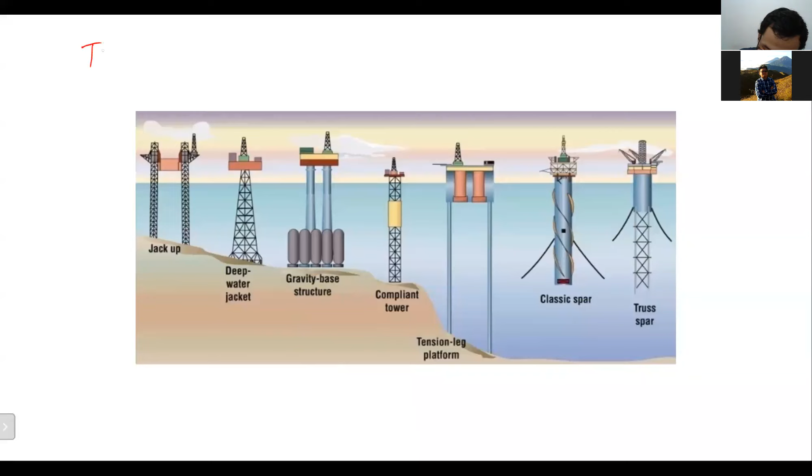So for now, I think I will continue with the discussion on truss. Okay, truss. Anyone here knows what is truss?

Any of you? I believe some of you have. Any of you? I believe most of you know about your parents' occupation. Does any of your parents work in the oil company or in the service company?

Mine, sir. Where, sir? In Konoko. Okay, so has your parent told you about his job there? Sir, yes, several times. What is his main job there? He's actually a project cost control advisor. Cost control advisor, okay.

Maybe it still has some relation because when talking about building a bridge like that, most likely your parents will be involved as well. Okay, in the oil company or in the service company, normally if we work there, we have to deal with a truss system like this.

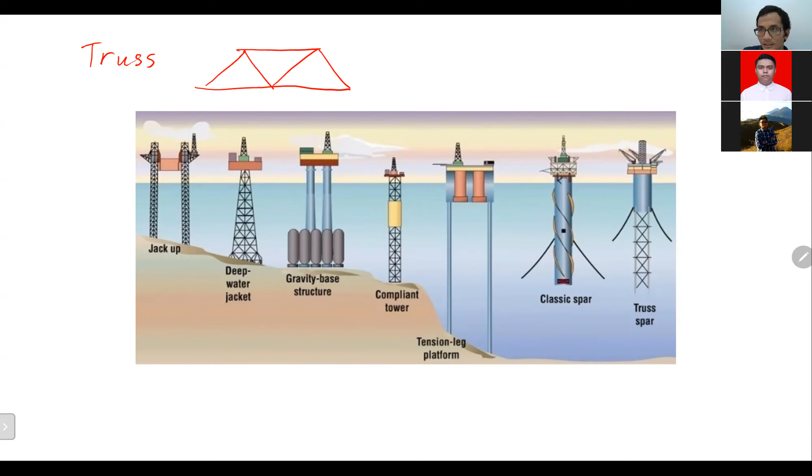Okay, this is a truss system which is available in the oil company. Okay, when we talk about truss, I believe you have seen this kind of structure, right? Something like this. Actually, it's not just available in truss, but in the bridge as well. In the bridge, you will see this kind of structure, right?

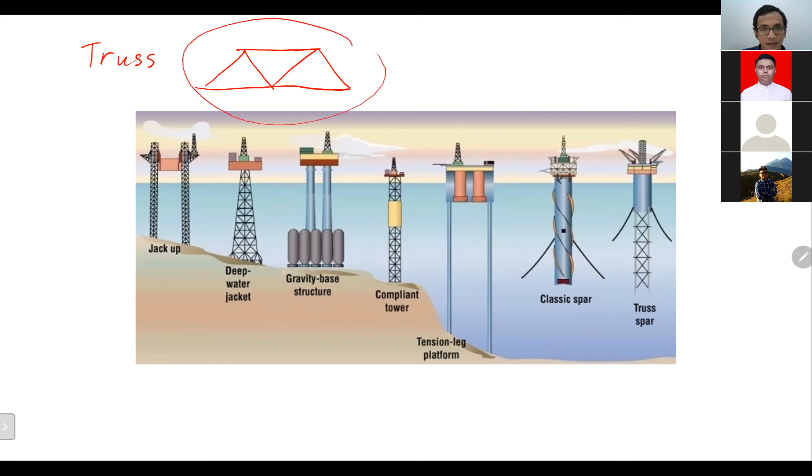Something like this. Also in cranes, right, sir? Yeah, crane as well. Crane, bridge, something like this. Okay, and in the offshore structure, yes, crane as well, yes.

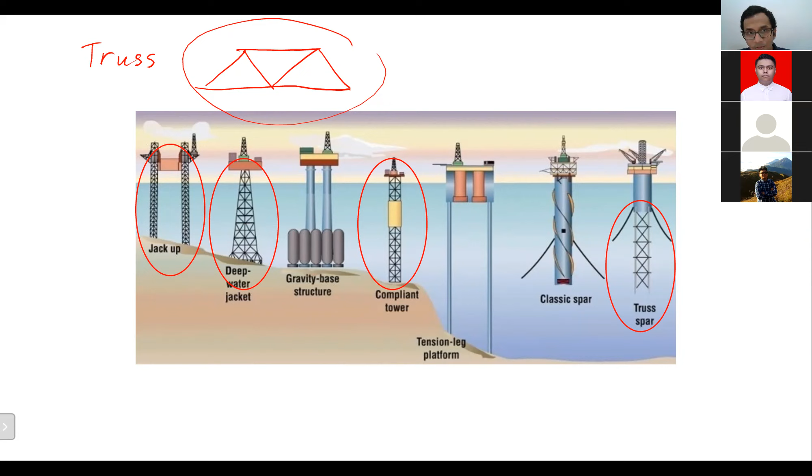So this kind of infrastructure is everywhere actually. So if you ask me what is truss structure, it is actually the structure which consists only of two force members. What is a two force member? I will explain to you after this.

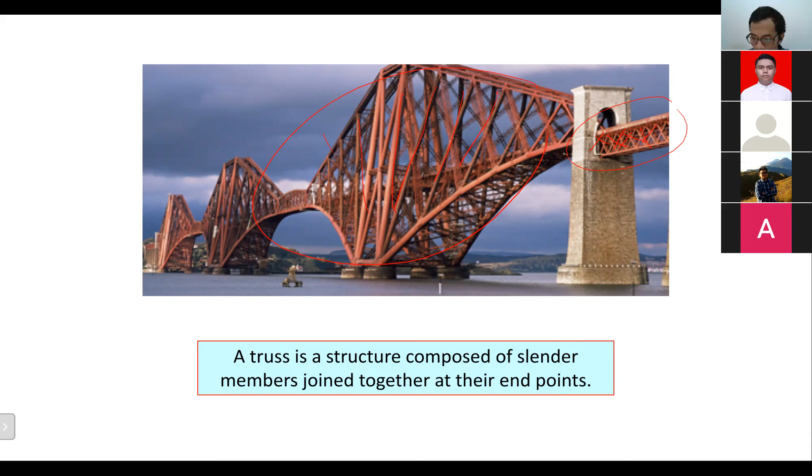So it consists of truss. So truss structure is something which consists entirely of two force members. Okay. How can we differentiate a two force member from other members? The other members you can see are slender members,

joined together at their end points. You can see, right? So in comparison to the bridge size, the member here, the beam—not the beam, the member here—is actually quite slender in comparison to the whole bridge size, correct, right?

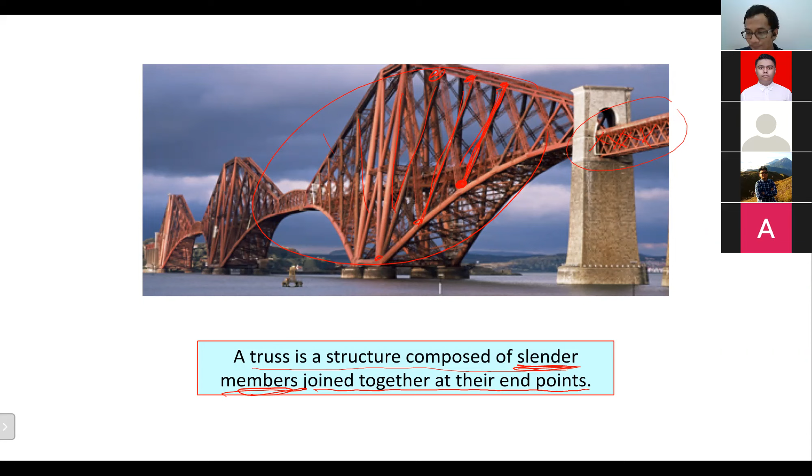And each member is only connected at the end of it, only. Each of those members are only connected at the end, only. Okay, this kind of structure you've seen everywhere, and we call it a truss structure. Okay, the same as this one. You can see there are a lot of members there. This is one of it.

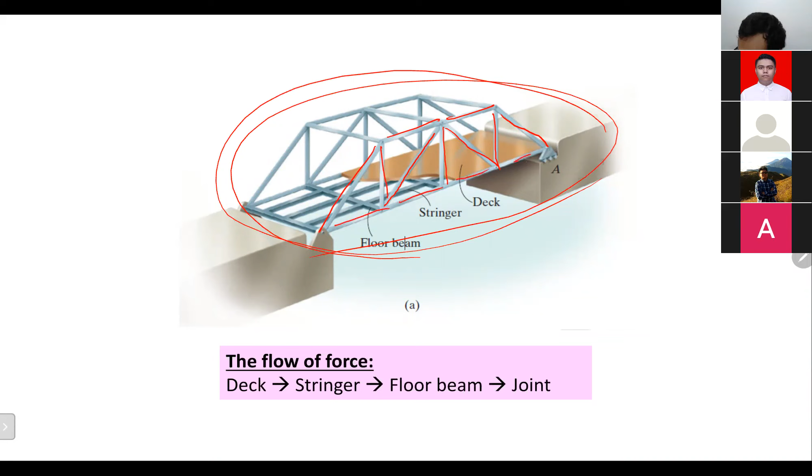Okay, and all of those are connected only at the end, at the end of the member. So all the connections are happening at the end. So there is no connection in the middle. That's why we call it a truss structure.

Anyone here still confused about what is truss structure? If yes, please let me know, and I will try to explain, try to elaborate a little more.

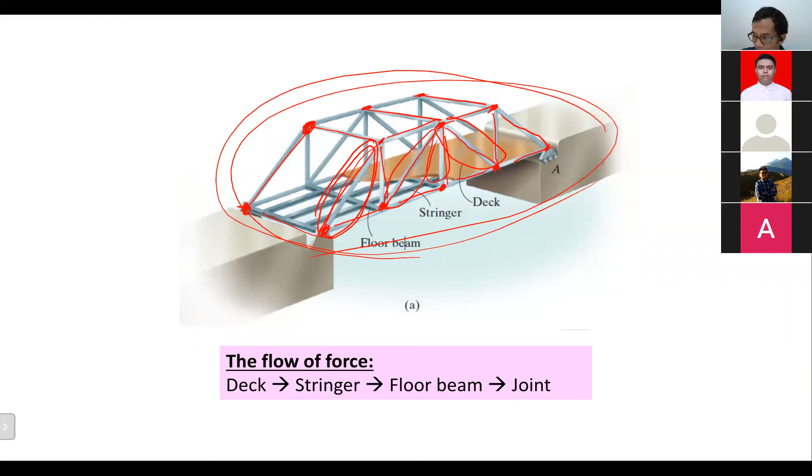But the most important thing about truss structure that you're supposed to learn is what is so special about it. Whenever we talk about truss, each member, or tiang-tiang, each of the members can only withstand either tension force or compression force. It cannot withstand bending, it cannot withstand force in other directions. So it's either tension or compression only. That is what's so special about truss.

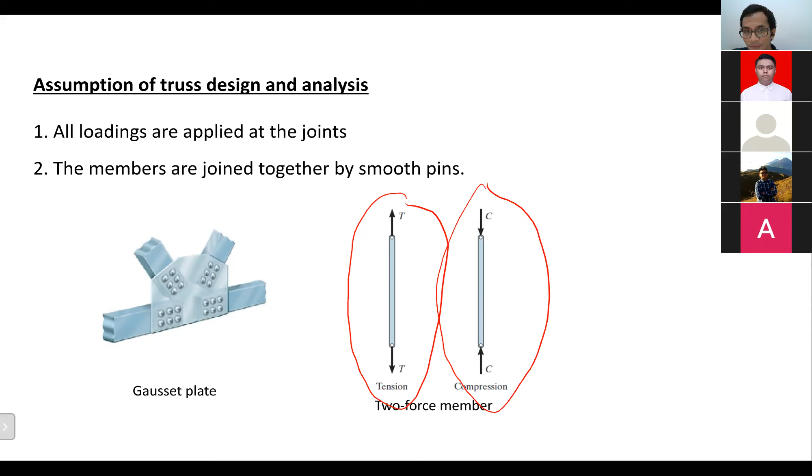And we call this kind of member a two-force member. Why do we call it a two-force member? Because the force only happens at both ends only, and the direction is either tension or compression like this. That's the first special thing about truss. So all the members, seluruh tiang-tiangnya, all the members must be two-force members. So must be like this.

Then the other assumption you're supposed to know when we talk about a truss system is that all the loading is only applied at joints. That's why the force is happening at only the end of the pin, the end of the member.

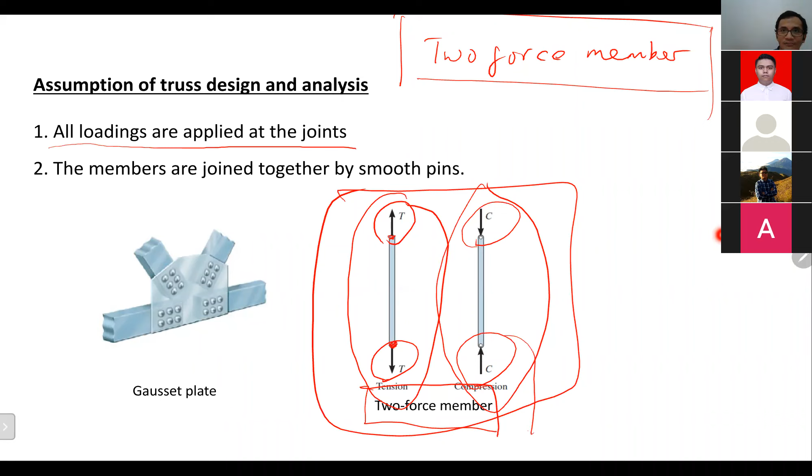Beside that, we always assume that the members are joined together by smooth pins. Sometimes we have something like this, right? If we assume that the structure is a truss, this kind of joint, we have to replace it by smooth pins, because in our truss analysis, everything is simplified, so smooth pins must be assumed like that.

Any question about the definition of truss? I'm sorry sir, I would just like to make sure, so the truss design itself doesn't relate to the materials, right? So if it's wood, it's still called truss as long as it's the structure itself.

Yeah, unluckily for you guys, you have never been to the Aula Barat or Aula Timur, West Hall, our ITB West Hall and ITB East Hall. Those two halls are very famous in Indonesia because they are very old halls, and some part of it has a truss structure which is made of wood. Irfan, so it's not necessarily have to be from metal, it can be from wood as well, or from other kinds of material.

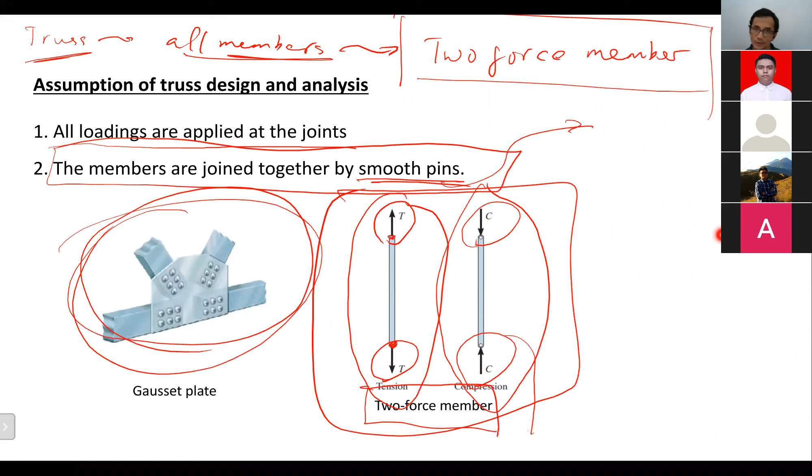Okay, that's the definition of truss. All the members must be two-force members. Any other questions before I go straight to the main problem that we have?

Sir, I want to ask about these smooth pins, Rafi. Do they have a specific property that differentiates them from like nuts and bolts or something like that? Okay.

Actually, nuts and bolts, sometimes we can assume as a smooth pin as well, because smooth pins is the easiest assumption that we have. Why is it the easiest? Because when we talk about smooth pins, for example, it's like this.

If we have a beam like that, at one end we put the smooth pin there to the wall, and at the other end there is a roller there. If we are talking about smooth pins here, because it's smooth, it will not give you a moment reaction. Because it's smooth, it will only give you horizontal or vertical forces. That's what's so special about smooth pins.

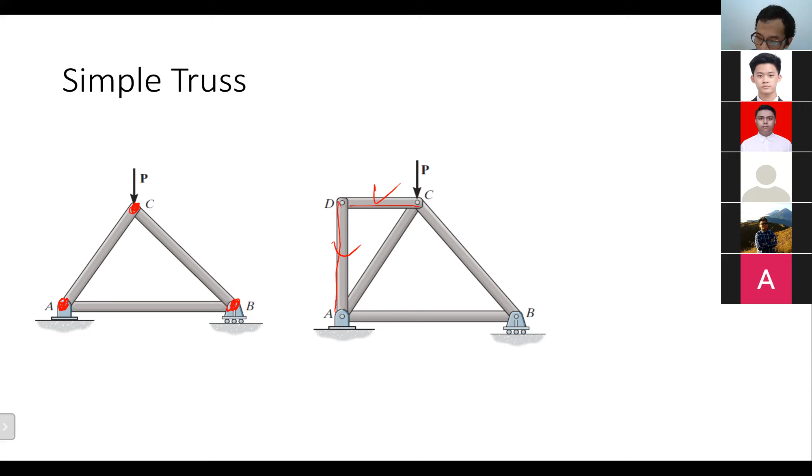The first thing that we're supposed to learn about truss is how can we analyze it? When we have a truss system, for example a bridge like that, a simple bridge like this, for example, pin at one end, roller at the other end, simple bridge like this. Then we know that there is a load, a car or something like that, 10 kilonewton, for example.

When we talk about this, we're supposed to know what forces are happening at each member. Why? Because normally each member has a maximum capacity, the maximum load where it still can handle. If it's more than that, if it's more than the capacity, if it's more than the maximum load that it can handle, that particular member will break. If the member breaks, the structure will collapse, and we don't want that. In statics, we don't want that. That's why it is very important for us in the truss analysis to know about the forces which is happening at each member.

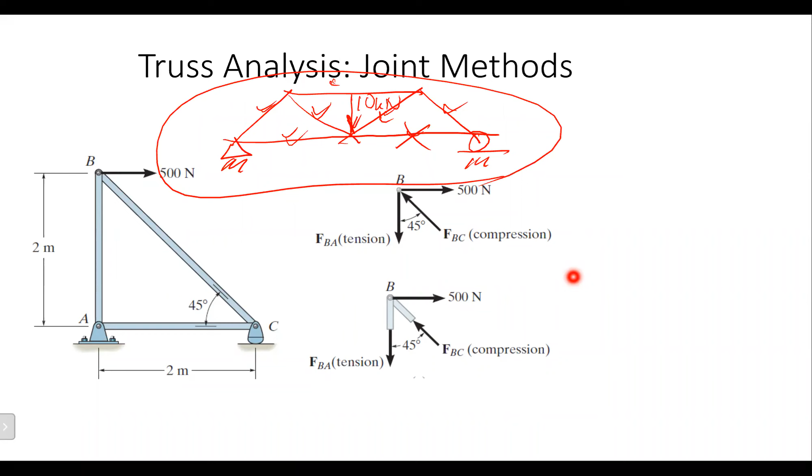Sir, I want to ask. Who is this? Azhar Nanda. Okay, Azhar. So if one of the joints collapse, all of the structure will... No, we are not talking about a joint which is collapsed. We are talking about a member.

Okay. Yes, of course, the joint will have the maximum load where it can withstand as well, but we will assume that the joint is perfect in our calculation, always like that. That's why in this case, we try to take a look at the forces which is happening at each member. If the load there is more than its capacity, the maximum load where the member can still handle, then it will collapse. That particular member will collapse.

But when one member is collapsing, the rest will be collapsing as well, because it will be a sequence like that. When one member is collapsing, and when one member has collapsed, there will be no load there anymore, so it will not be able to withstand load anymore. So it will affect the other member as well. The load that the other member must withstand will become bigger as well. So most likely, if that happens, the other member will collapse as well. That's why when you see a bridge collapse, sometimes it started with one member, then the rest will follow up. Do you get it, Azhar? Yes, I get it.

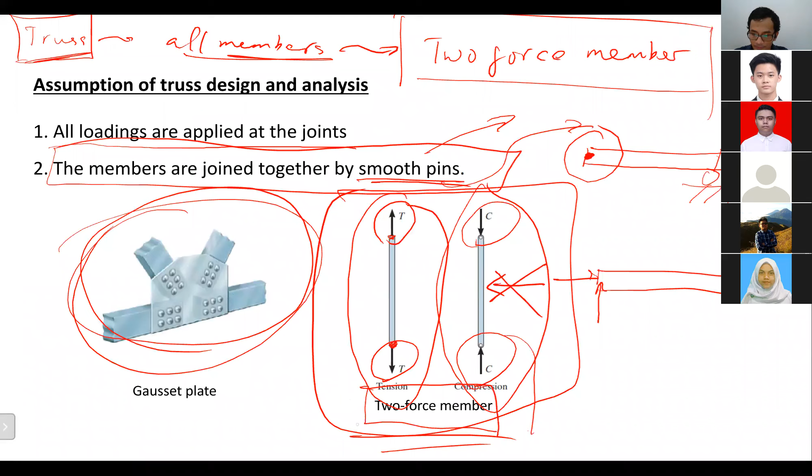The answer is simple, because I told you from the beginning that each member in the truss structure can only withstand either tension or compression. As I stated here, only tension or compression. At each member, it can only withstand tension or compression.

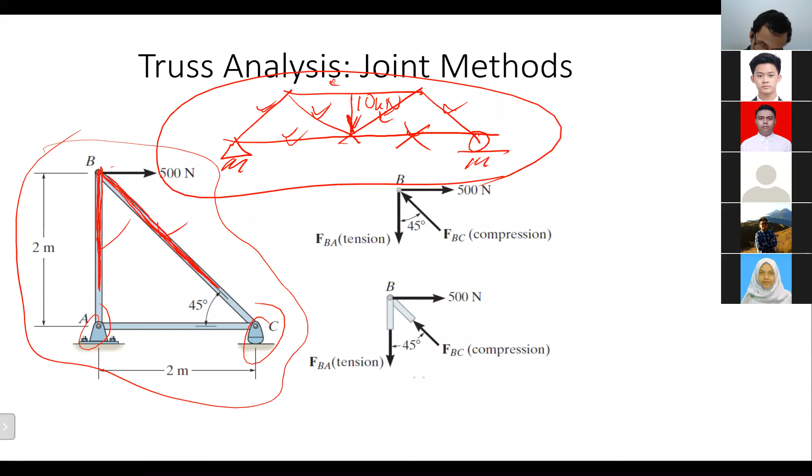Then we know exactly where the direction of the force is. The direction of the force happening at member AB and member BC is either tension or compression, so we know the direction as well. If it's either tension or compression, the line of action of the force will be at the same line as the member. So the direction of the force at member AB will be the same line as member AB, and the direction of the force at BC will be the same line as member BC.

From this we know several important pieces of information: first, FBC's direction will be 45 degrees, and FAB's direction will be vertical. Because we already know the direction happening at each member, since it's always tension or compression,

we can try to analyze the joint, the forces happening at the joint, for the truss structure. Because like it or not, static equilibrium will still be happening. For example, if I analyze joint B, there will be 500 Newtons to the right. Besides that, joint B is the connection of member AB and member BC, so for sure there will be an effect, there will be a force there which is happening due to member AB and member BC. How can we know that?

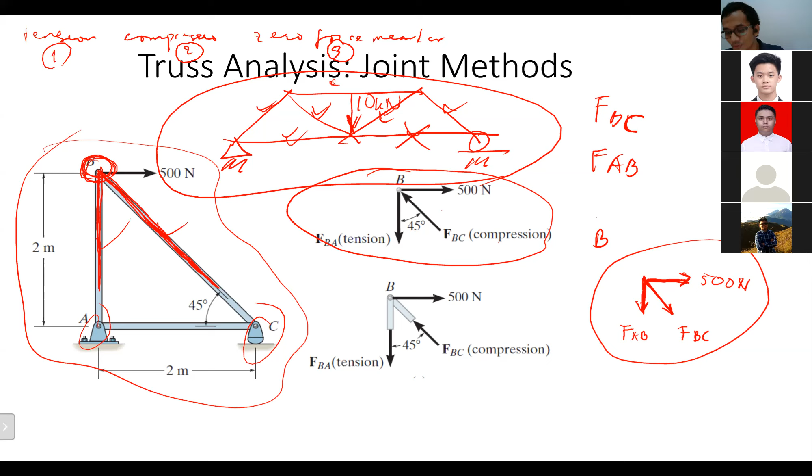So the option is only this. But in order for us to analyze it correctly, we cannot assume from the beginning that it's a zero force member without any proof. That's why we always assume either under tension or under compression. Here, I assume everything is under tension.

Can we do that? Yes, we can. Then what are we supposed to do after that? We have to solve it, of course. How can we solve it? We can solve it using equilibrium equations, of course.

Okay, now, Rafi. Which equilibrium equation can we use to solve this particular problem? The free body diagram at point B here, the one that I drew just now. We can use sigma fx equal to 0 and sigma fy equal to 0.

Can we use sigma moment equal to 0? I don't think so, but I'm not sure. You have to be sure, because it is not possible to use sigma moment equal to 0, because all the forces are happening at the same point, right? At point B. So there will be no moment, so it will be useless. So we have to use sigma fx equal to 0 and sigma fy equal to 0.

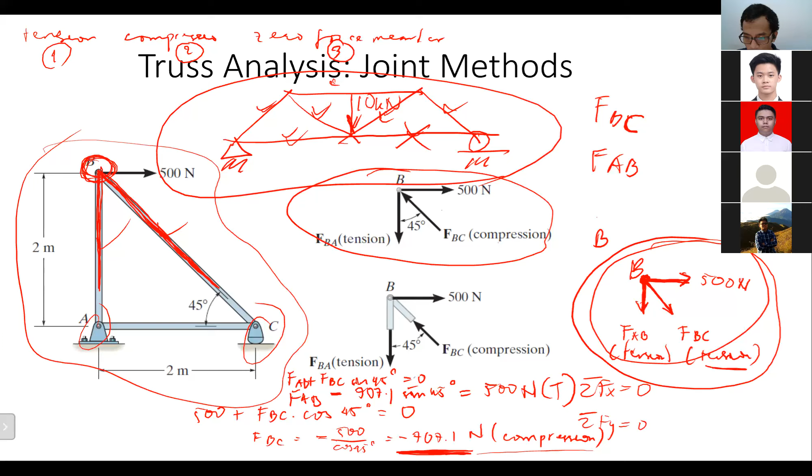It's not updated, okay then it's okay. Oh, just now your question is why, if we use...

Why tension is in that direction and compression is in that direction. Yes sir, okay, so it's like this. Please don't try to take a look up, just use it.

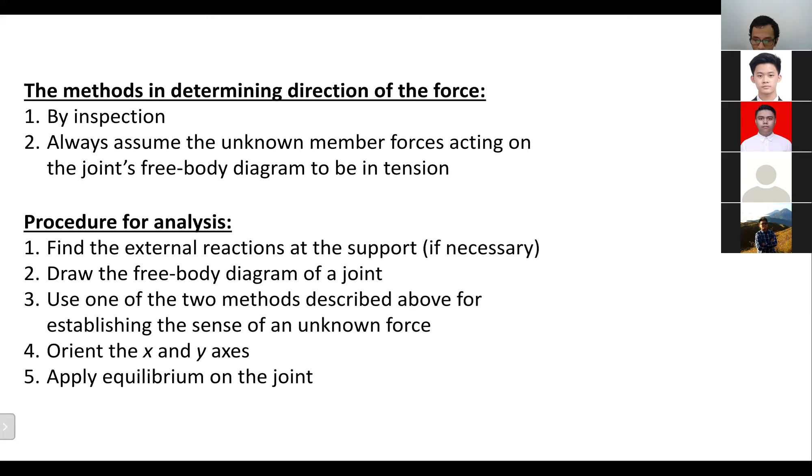Okay, I will just use this thing. When we have a member like just now, it's supposed to be like this, then like this. But anyway, if I have a member like this and like this, then here we have a roller, and here we have a pin.

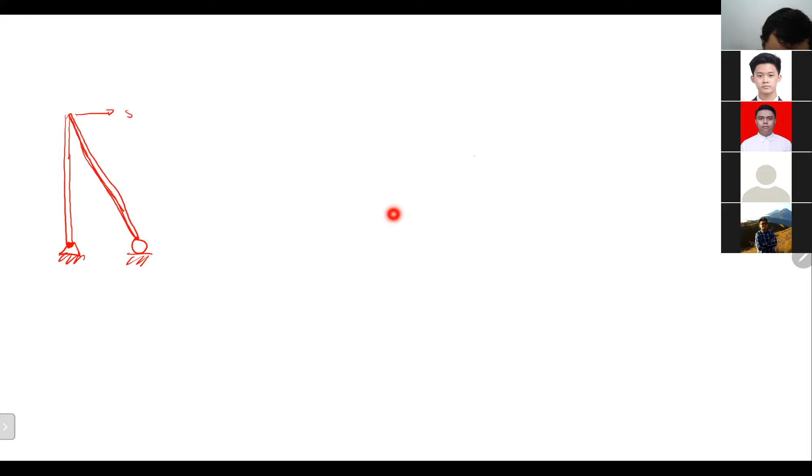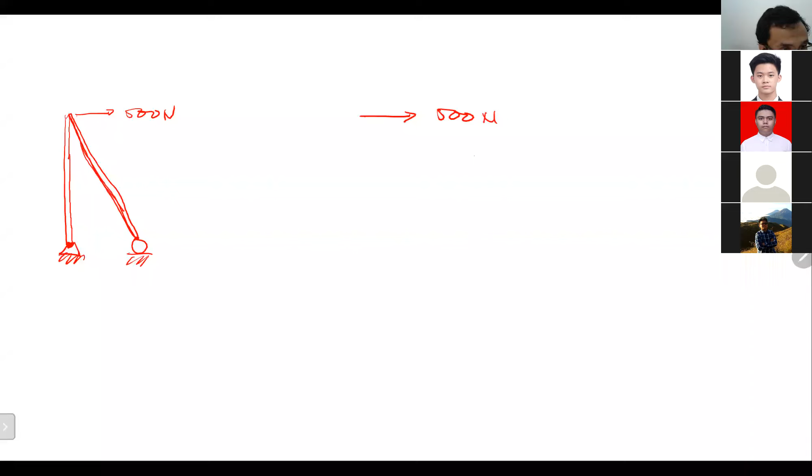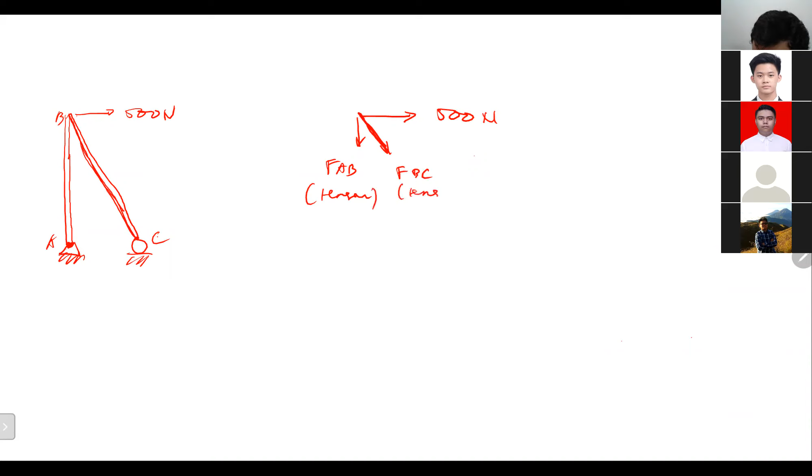Tension as well - why tension in this particular thing is in that direction? That's your question, right, Matthew? Hello, Matthew. Where is Matthew? I'm here. I'm thinking, yeah.

So actually it depends on where we see it, Matthew. So when we take a look at the member, for example, I use member AB here as an example, tension is supposed to be like this, right? Correct or not, Matthew? Yeah. Okay, this is our FAB.

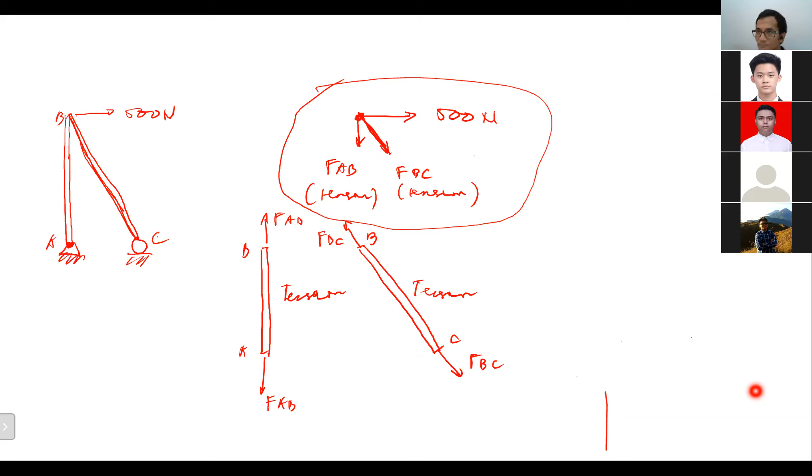Okay, but if we take a look at joint B, this is joint B. Member BC is actually pulling the joint B as well, so they are pulling each other. Joint B is pulling member BC, member BC is pulling joint B. That's why if we take a look at joint B, at joint B there, member BC is pulling joint B. That's why the direction is like this, because its tension is pulling.

But on the opposite side as well, it's correct. Member BC is being pulled by joint B, that's why the direction is like that. So this and this are action and reaction, Matthew. Do you get it, Matthew?

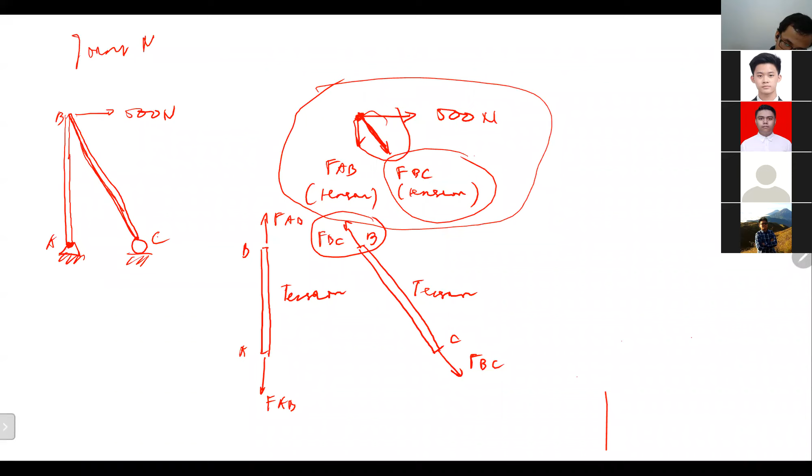Yes, a little bit, yeah. So by using the joint method, we are trying to see the joint. We are not looking at the member. We are trying to see what is happening at joint B here. So at joint B, what we try to see is what forces are happening at joint B.

So besides 500 Newton, what else? We can see that at joint B, each member is giving a force at joint B, and the force depends on the assumption. If we assume that at joint B, BC and AB are both under tension, then both are supposed to be pulling joint B. So whenever we talk about tension at a joint, we always see that the force is going further away from the joint. So you can see it, joint B here, and FBC is under tension, that's why the force FBC is going away. AB is under tension as well - our assumption is AB is under tension, that's why FAB is going away.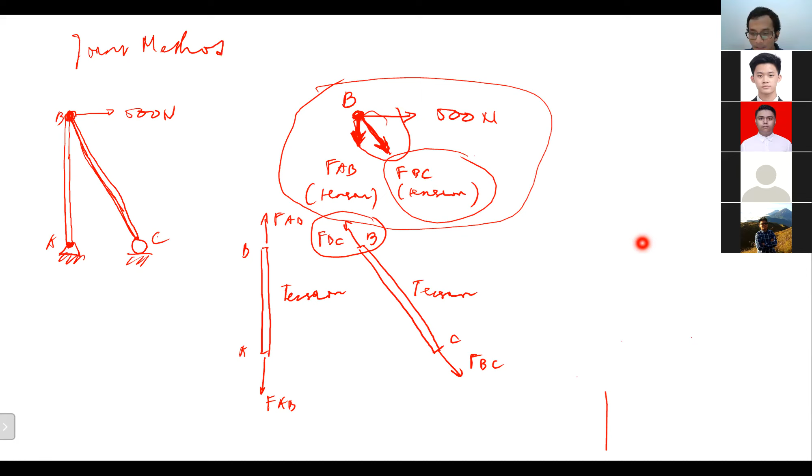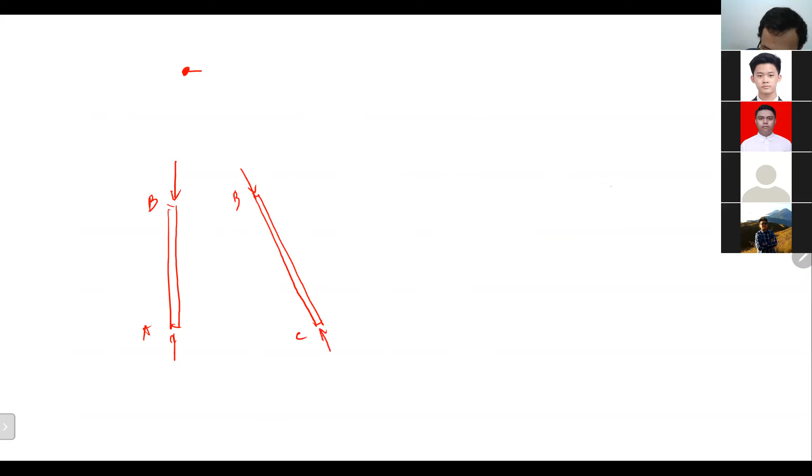Okay, but we can say the opposite as well. If we assume AB is under compression like this, and BC is under compression as well, like this, and if we take a look at joint B, we said 500 Newton force there. The forces due to member AB and member BC are not going away because it's compression. Compression means the member compresses the joint, pushing the joint, so the forces there will be going in.

FBC. This is under compression.

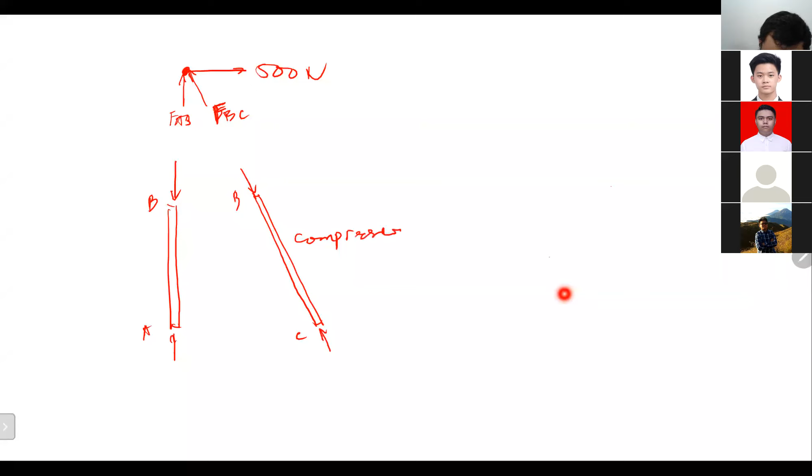Do you get it? Sir, in short, can we just assume the other, let's say there's BC, right? Because B is the joint, can we just say if like this compression at C point, there's a force towards the B. So compression is towards the B. Oh yes, correct. The same.

Okay, so you can think as well that if it's compression, when we talk about joint, the forces are always going towards the joint. It's compression. If it's tension, the force is always going away from the joint.

Will this change the fact if 500 newtons is to the right? No, it won't. 500 newtons is given, right? It's an outside force, so we will not change that.

Okay, because this one is just an assumption, right? Matthew, you can assume anything. You can assume the FAB is compression, or you can assume the FAB is tension, like this. Like what I told you before, FBC under tension as well, like this. You can assume it this way as well.

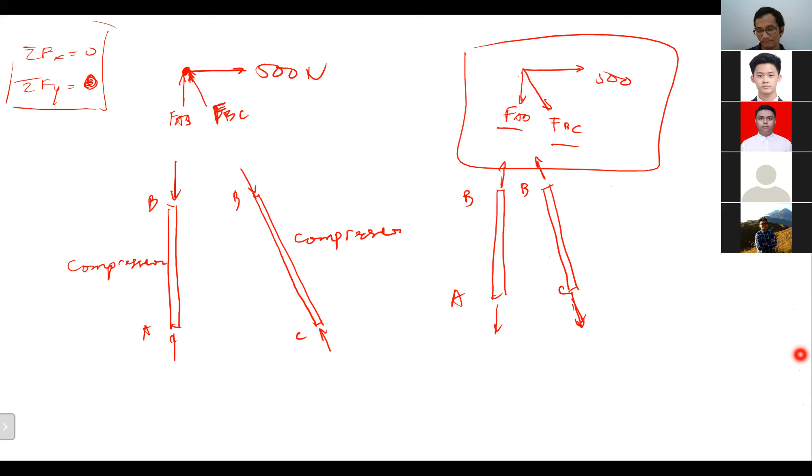Okay? I understand, sir. Thank you. So basically, sir, if we encounter compression in the problem, we could just assume it as negative tension. Yes, compression is always negative tension. So we could just convert it. If the question says compression, we'll just assume negative tension like that.

No, because from the beginning you can always assume as you like. So from the beginning you always assume that, because normally the given problem is like this. The given one is only the external forces, and where is the joint? In this case, is a pin. Sorry, this is a pin and this is a roller. Okay, so you can always assume each member is under tension or under compression from the beginning.

That's what I normally do. Not that that's what I normally do, but that's normally how it is. The problem is normally like this, and the problem is always trying to determine the force which is happening there. Sometimes you are only asked to find one member, the force happening at one member or two members, right? But sometimes you are asked to find all the forces happening at all members. That's why for me, it is easier to always assume that all the members are under tension.

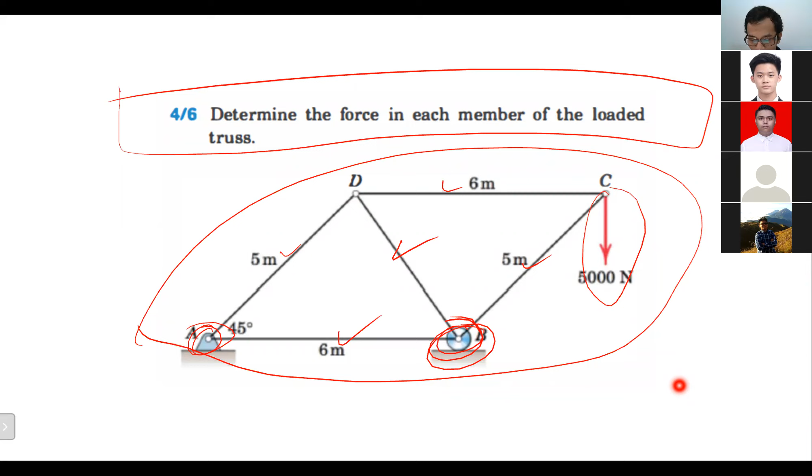Yep, actually there are several ways, Matthew. Okay, that's a good thing you started from that point. But sometimes some of you want to solve for the external forces happening at point A and point B, right? It can be done, right? Solving point A and point B: AX, AY happening at point A, and BY happening at point B. Actually, it can be done as well if you use the free body diagram like this.

Okay, there will be BY, AX, AY. You can solve for BY, AX, AY using sigma Fx, sigma Fy, and sigma moment for this particular free body diagram. Sometimes you still need to find out the external forces like this first, but sometimes you can solve it directly. And this is one of the problems where we can solve it directly, like what Matthew said just now.

Because by solving at joint C, we will be able to find out FCD and FBC. Correct, Matthew? The force will be at the opposite direction of AX and AY, right? Tension... you cannot say it that way, because to solve for AX and AY, you have to use this particular free body diagram. Now it has no relation with this one. Maybe. But the question is not AX, AY, and BY, right?

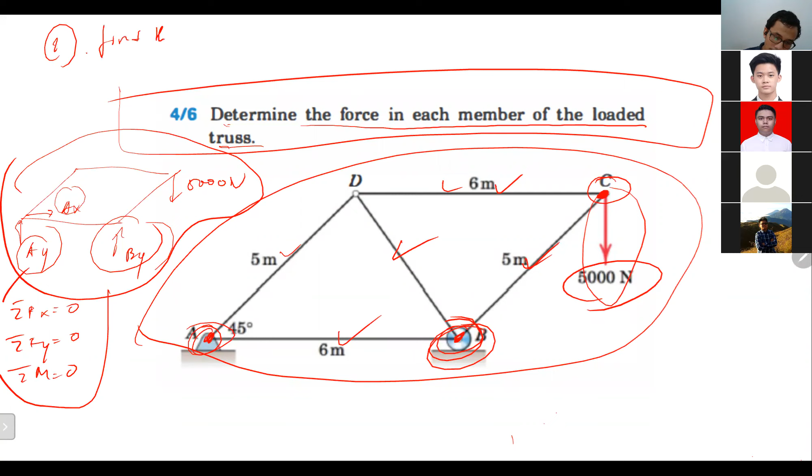At that joint that you want to solve. Then after that, you have to ensure as well the joint that you want to solve must only have two unknowns - two unknowns only. Why two unknowns? Because at each joint, we only have two equations, sigma Fx, sigma Fy equal to 0. There will be no moment there, no sigma moment equal to 0 that we can use. So we can only use these two: sigma Fx equal to 0 and sigma Fy equal to 0. That's why we can only solve for two unknowns.

That's why it's correct, just now Matthew said that we can solve for FCD. We can solve for FBC by solving joint C here. Because from joint C, we can draw the free body diagram like this: 5,000 Newton, then we have FCD here, then we have FBC here. Remember that the angle you're supposed to draw correctly, right, based on the known angle and all the data that we have. Because it becomes a geometrical problem. By using joint C here, we will be able to solve for FCD and FBC using this.

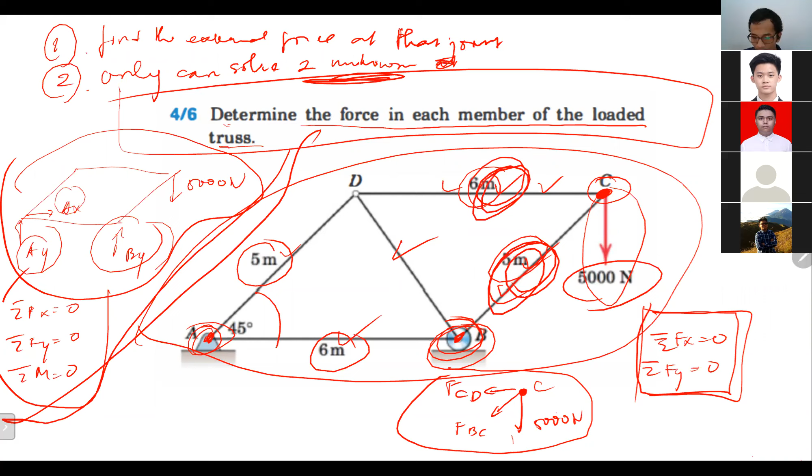After solving for FBC and FCD, then we can try to take a look at the other point. Now we can try to solve for point D because FCD is known already. So we can solve for AD and BD there. Remember, each joint we can only solve for two unknowns, so you have to do it step by step.

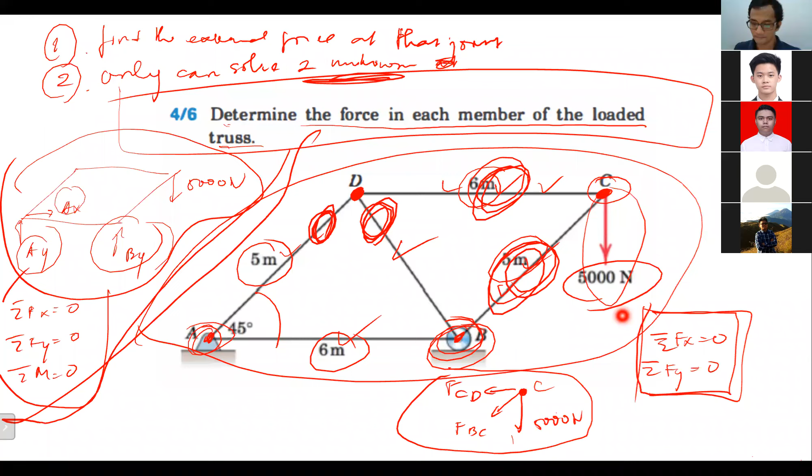Okay, because time's already up, I think I will give you some homework for you to practice more - some basic homework for the truss, and some advanced homework about the equilibrium. Okay, I think that's all for today. Don't forget to submit the homework by Thursday next week before the class. Okay, I think that's all for today. Thank you very much for listening.